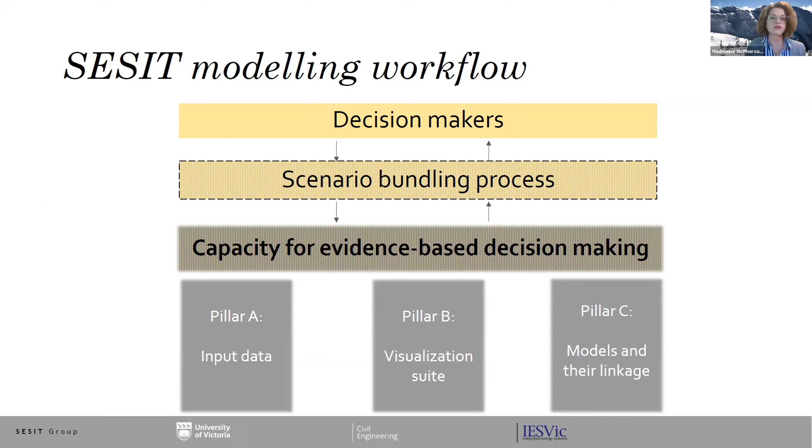All of this is part of a much broader workflow, working its way all the way up to supporting decision makers. So in today's presentation, Rick and I are going to start us off with a review of CODERS, which is a large database we've been assembling to populate our sector-specific models that sit within our broader modeling suite.

I've touched on our overarching objective, and now we're going to move on to some of the data challenges we've faced and how several key priorities have informed our database design decisions. Next, Rick is going to walk us through the Coders database itself and how this links up with our SESIT modeling suite, specifically as it pertains to some of the electrification and integration questions we have. Then finally, I'm going to wrap up with some closing remarks on limitations that still stand and what our future work might look like.

The challenge that we face from a data perspective, and more broadly within Canada, really comes down to barriers between modelers and decision makers. This barrier really impedes some of the deep decarbonization efforts that we need to operationalize if we're going to hit some of our climate mitigation targets.

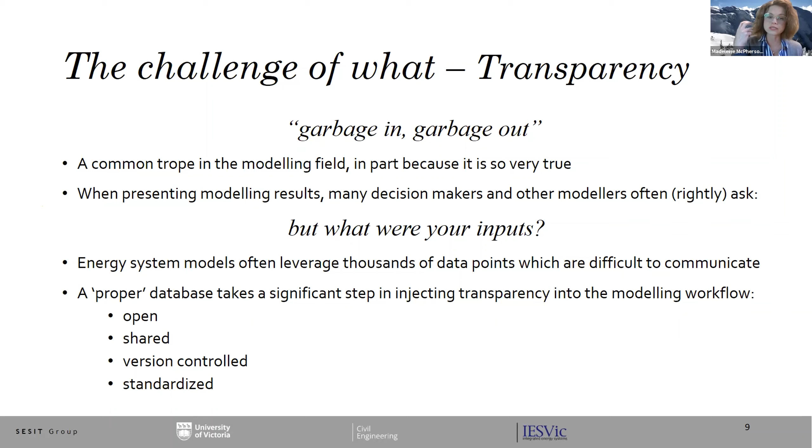Coming back to our primary question: how can we model the electrification and integration of energy systems to explore and implement deep decarbonization pathways? What we're trying to argue is that we need a new platform that delivers a holistic understanding of electrification and energy systems integration, one that also sits within an institutional structure conducive to and effective in the decision-making process.

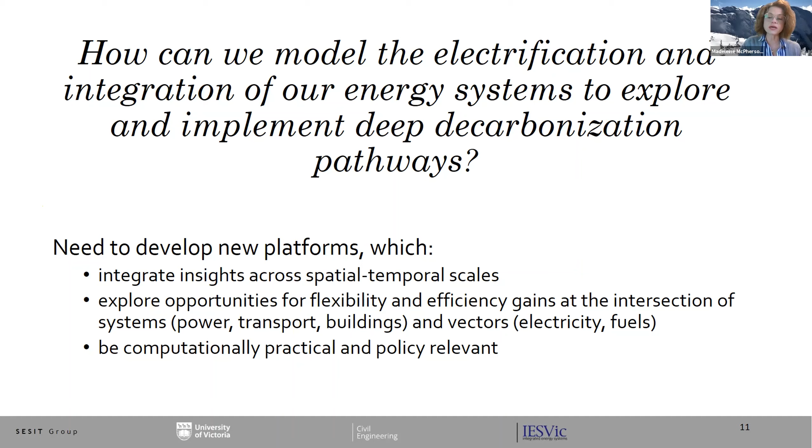Such a platform needs to integrate insights across spatial and temporal scales and explore opportunities for flexibility and efficiency gains at the intersection of systems and vectors. But it has to do so in a way that is still computationally practical and policy relevant. Looking through this list, we see that we need to assemble an integrated suite of modeling platforms supported by an integrated and consistent set of data.

So the SESIT modeling suite is attempting to pull together this integrated and holistic perspective by representing each of the energy systems with a standalone model. Making this decision allows us to address the full complement of sector-specific operational constraints. It allows us to leverage a diverse and appropriate suite of modeling methodologies within each of these sectors, and it also allows for a lot of extensibility—we can swap alternative models in and out of the platform, using certain models or not depending on the research question, and so forth.

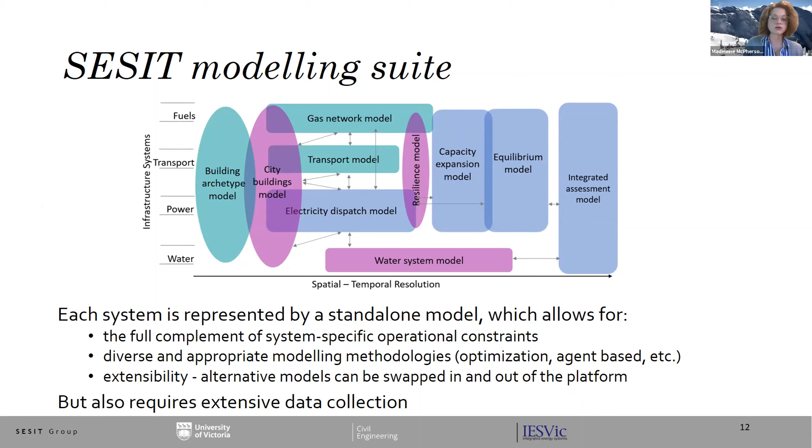But looking at this suite, you can see this is going to require an extensive amount of data to populate each of these models. So at this moment, I'm going to pass it back over to Rick, who's going to talk about each of the data inputs to these models and the CODERS database specifically. So over to you, Rick.

Thanks, Madeline. Good morning everyone, or good afternoon for those a little further east. My name is Rick Hendriks. I am a PhD student in civil engineering at the University of Victoria, and I've been the primary person responsible for gathering all of this data over the past 18 months or so. We're sweltering in the sunshine here in Southern Ontario today, so I'll try to shed a little bit of that light onto the CODERS database.

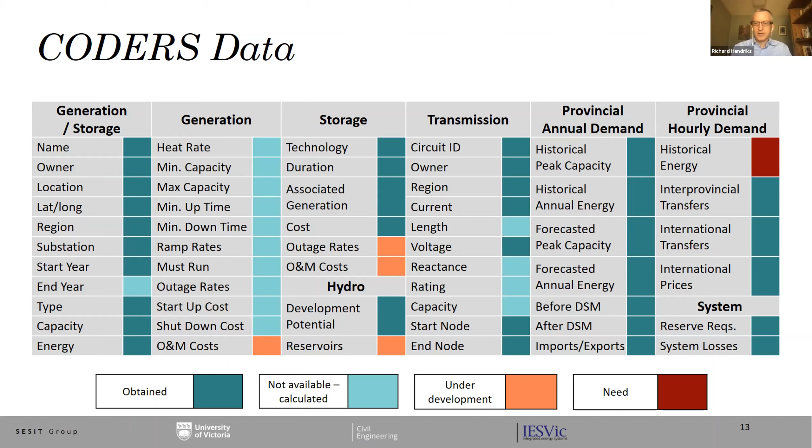I'm going to use a legend throughout these slides. The dark green indicates high quality data we've obtained from a variety of sources—utilities, system operators, government, etc. The pale green indicates data that was not available in the format we would have preferred, so we've had to calculate, measure, or estimate it to acceptable thresholds of error. Some data is still under development, meaning we have a request outstanding to a data provider, or we're still sorting through it. The red is data we still need—we weren't able to access it, and we don't have it from measurement or calculation. Next slide please, Madeline.

So the first model in the suite is a capacity expansion model. The model being used by our group is called the Canadian Opportunities for Planning and Production of Electricity Resources, otherwise known as COPPER. It assesses how the electricity system might evolve in terms of generation, transmission, and storage in response to evolving needs, and how that evolution is affected by changes in demand, technology, policies, etc. It's a Canada-wide model, although it could be used at the provincial or regional level with multiple provinces—we're considering some of those options. It's also a static and dynamic model. Next slide please, Madeline.

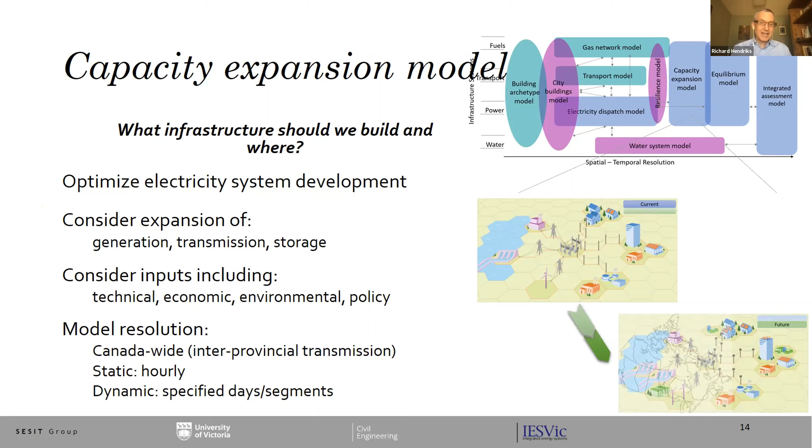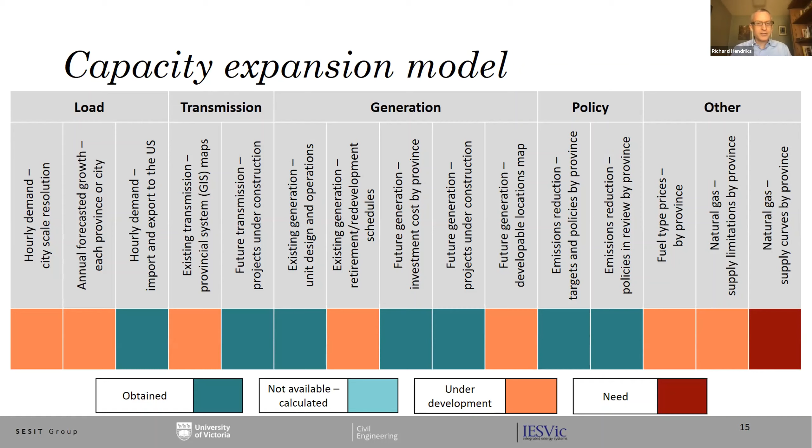This model requires a fairly broad suite of data. I won't get into each data point, but to give you a high level sense: we need load data, transmission data, generation, policy—what carbon policies, what other environmental or energy policies are in place that we want to model—and some other data, particularly around natural gas. This tends to be fairly detailed data. At the transmission level, that was probably the most difficult data for us to obtain, because we're trying to get length, voltage, reactance—not so much for this model, but for others—so it's been quite a challenge. The hourly data has also been very important for our models, and that's been challenging as well. Next slide please, Madeline.

So on to that next model, which is the electricity dispatch model. It's really the cornerstone of the modeling platform. The model we're using is called the Strategic Integration of Large Capacity Variable Energy Resources, a bit of a mouthful, so we just call it SILVER for short. Copper and silver, creative names, very clever names.

Basically this economic dispatch model takes the outputs of the capacity expansion model and assesses the operations, looking at the operational level. If the capacity expansion model says this is what we should build from a lowest cost perspective, the dispatch model is saying, well, can you actually do that? What does that look like? And what are some additional costs or cost changes that might occur at the operational level?

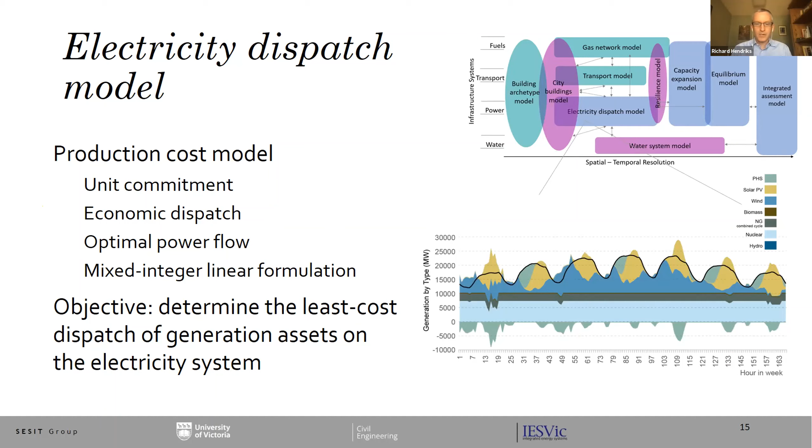In terms of data, since this is an operational model looking at the operational level of the system, we need much more detailed data at the hourly level and at the operational level of the various assets within the system. So generally, we have more data gaps in the database in relation to the dispatch model than the capacity expansion model. But we are working through these.

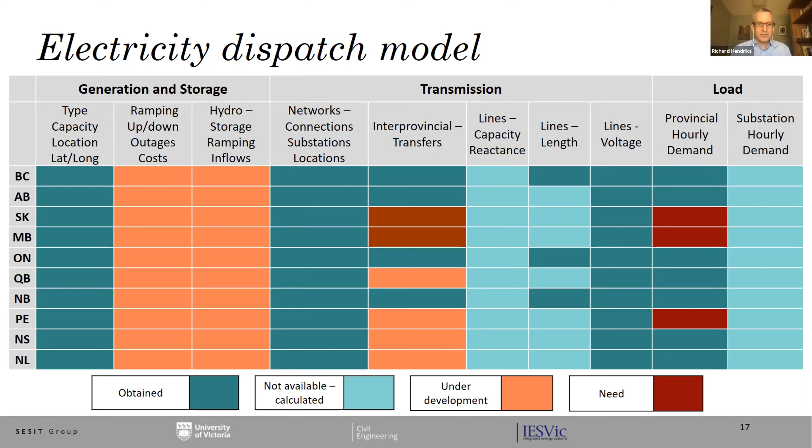As you can see, several of these are under development. And we have a few more red areas here where we're still seeking data, particularly in Saskatchewan and Manitoba, around transmission, design, and operations, as well as hourly load within the provinces and between those provinces.

So the third model is a transport sector model. Incorporating this kind of model into the platform enables analysis of transport electrification, which will be a key issue going forward, through both electric vehicles as well as hydrogen vehicles. It's also a multi-layered model, and my colleagues will be speaking about this model in a future presentation today, so I'll leave the details to them. For our purposes here, it includes several energy vectors, modes, and node types.

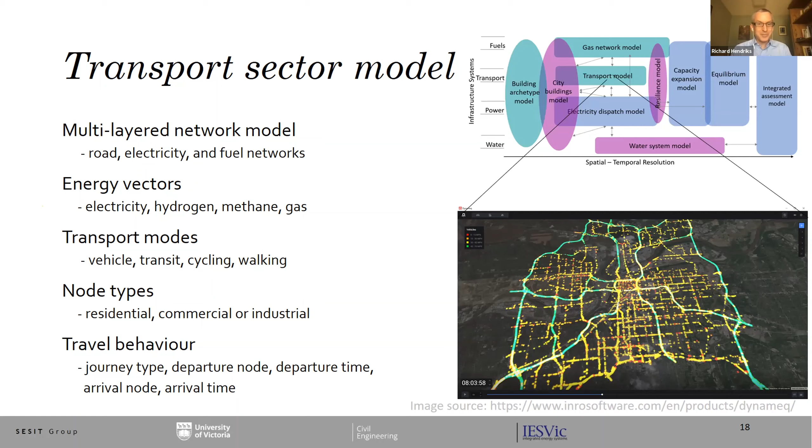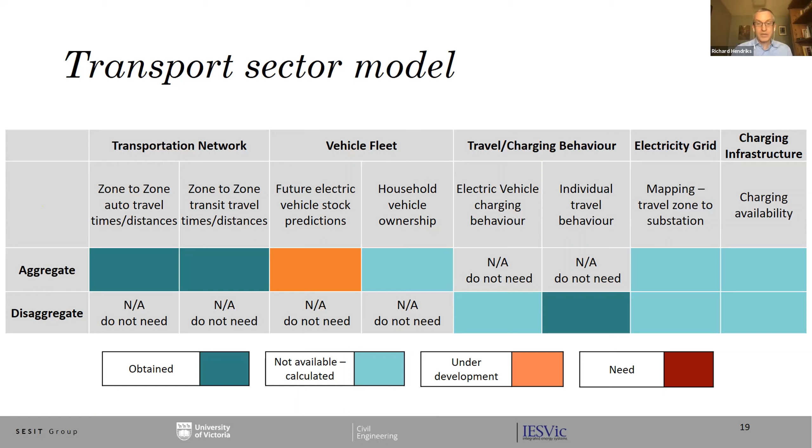So all of these, as you might imagine, tend towards data requirements. The focus of this model has been within the city of Regina, so this table relates only to the status of data for that modeling purpose. In general, we've been quite successful at getting the data in terms of modeling transportation within the city of Regina. Either we've obtained the data or we've been able to calculate it. There are a few things still in the works, but overall we have what we need to implement the transport model.

And of course, there's a building model. Incorporating a multi-vector building model enables exploration of things like heating electrification, on-site behind-the-meter electricity generation, and demand response, all of which are key aspects of electrification and decarbonization. The models we are using are largely existing models, but we're leveraging and adjusting those models for our purposes. Again, my colleagues will speak to that in more detail.

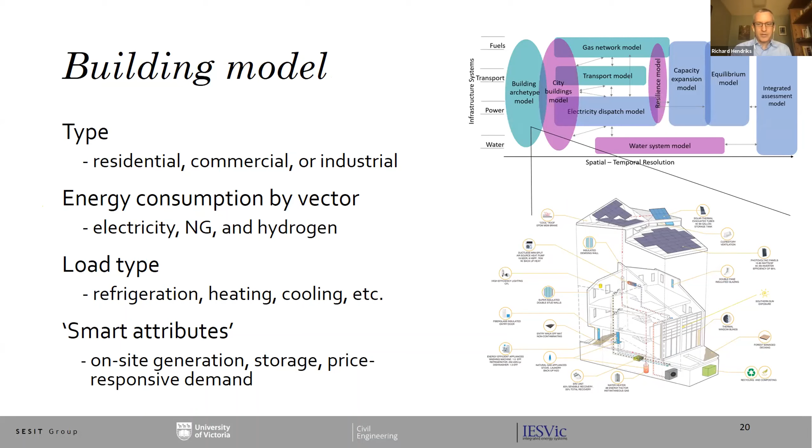In terms of data availability for the building system model, we characterize it in terms of availability at the building specific level, at the building archetype level, and also gathering data from surveys about various aspects of the built environment. Data collection here is very much in progress, and some areas are still under development, quite a few that we still need. Generally speaking though, if we can get good quality data from one of the sources within each column, then we're well on our way in terms of completing the modeling.

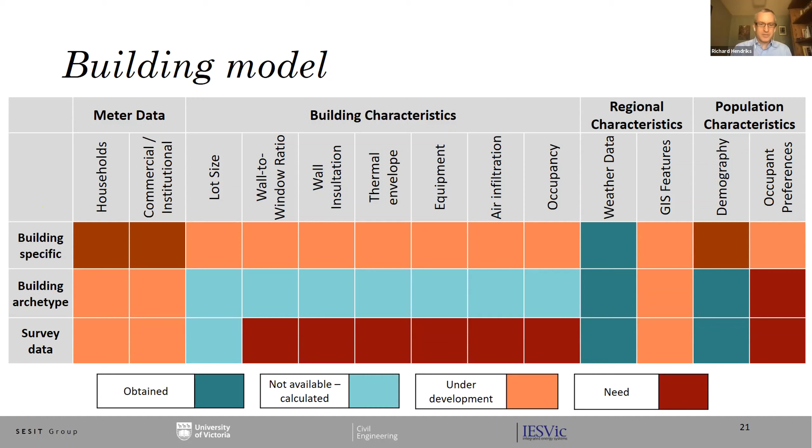At this point, I will hand things back over to Madeline. Thanks. So we still have a few limitations with the data, as I'm sure you were hearing a little bit from Rick there with all of those red boxes.

There's a number of limitations with the data itself. These are areas where we know we need data, or where we're still working to identify additional data that we need, particularly from other sectors, both other energy sectors, but then also beyond the energy sector, looking at things like water, agriculture, industry, climate change, and so forth.

Our next limitation really comes down to access privileges, and these stem from the fact that currently our database is hosted through Compute Canada, which allows access to researchers who have statuses confirmed or sponsored by faculty members at Canadian universities. So currently this is limiting our pool of users to people with some kind of connection to academia. Our future work is going to be migrating this database onto a more broadly accessible hosting platform.

And part and parcel with that is going to be a website and a GUI with a nice front end to allow users with different interests or a modeling capacity to interact with the data and connect that front end to the back end, which would retrieve the data, process it, and send it along to the front end.

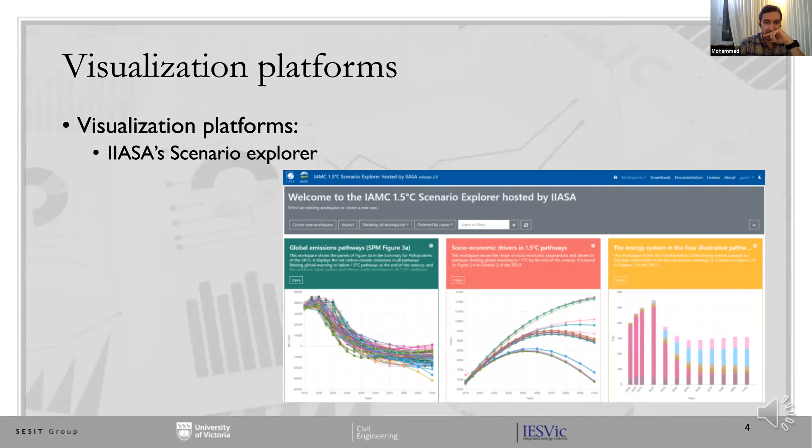In the electricity system modeling community, visualization platforms are mostly software specific. There are limited options for presenting visualizations from different models in a single space. The options for comparing between models are thus limited. Commercial modeling tools have their own interface and visualization module, but they are rigid and tied to their own base model. Even in open source models, the visualizations rely on custom implementations of open source plotting functions.

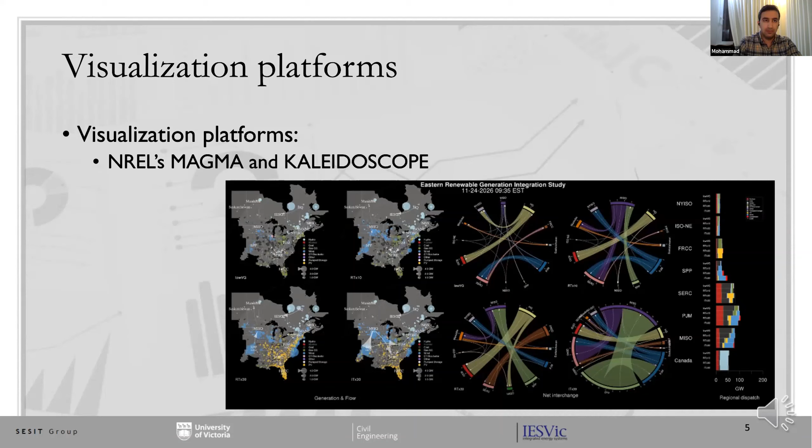Magma and Kaleidoscope are developed as an open source package by National Renewable Energy Laboratory to plot Plexos, their electricity operational and planning models outputs. They do not accept generic inputs and are bound to receive Plexos specific outputs.

In conclusion, most of the visualization platforms only involve the integrated assessment models. Most of them are model specific. Therefore, sectoral and high resolution models are not still communicated in the most efficient way to the stakeholders.

Based on the reviewed limitations, and accurately studying the needs from the modeling and policymaking communities, this research is looking for the following objectives by developing an integrated modeling platform that includes 5 different model types: integrated assessment models, capacity expansion models, electricity operational models, transportation models, and building energy simulation models.

First, this research develops a process flow to convert the results of the models into a standard data format. Second, this study develops a set of plotting functions that use the standardized results to create figures with interactive widgets that allow for quick multi-platform comparisons. Third, the platform developed in this project is accommodating a standardized but flexible format for reporting model outputs. And finally, the project publishes the code in an open, accessible, and transparent manner, completed with appropriate documentation.

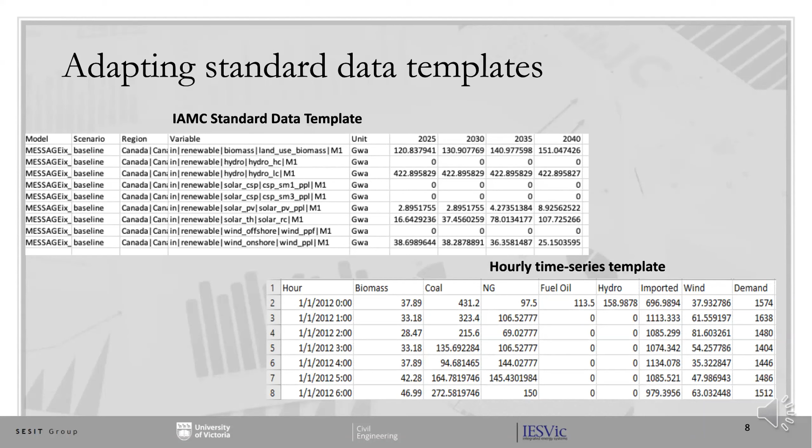The workflow of the platform is as follows. Results from an energy system model are post-processed into a standard data template, chosen out of the two templates we mentioned previously, based on the model type. The post-processed output data template then can be categorized according to user-specified criteria. Followed by the data structuring, a plotting function is performed on the resulting data structures and then hosted on the visualization dashboard. The plotting functions have the capability to plot interactive plots for the model results. These results are then integrated on the visualization dashboard.

The models that are integrated in the platform are categorized based on their data template. The first category uses the IAMC data templates, which includes two model categories. The first is the integrated assessment modeling category.

These modeling tools help researchers and policymakers understand the long-term consequences of varying socioeconomic development and climate change scenarios across various scales, energy vectors, and sectors. They are mostly used for assessing the costs and benefits related to climate change impacts and mitigation strategies.

MessageIX Canada is built from the MessageIX Globium framework, specifically for this project by SESIT. The model combines different modeling frameworks to assess multidisciplinary policy decisions. Results from these models can answer ambitious global warming goals at least possible cost.

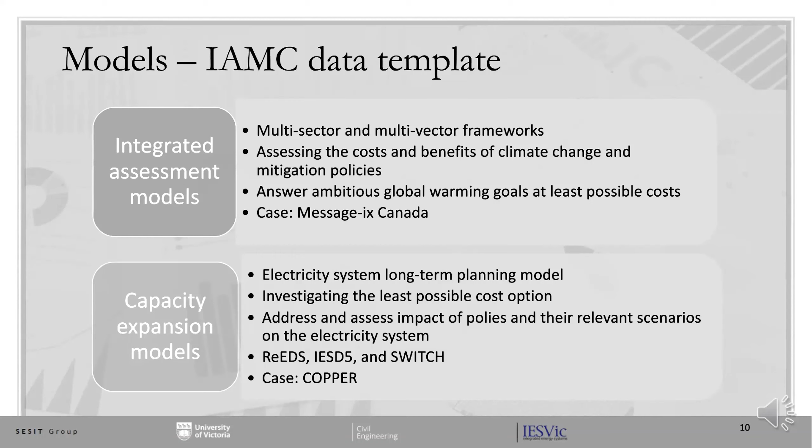The second category belongs to the models that use a similar time series data template here, in an hourly resolution for the project. The first category is the electricity system operational model, which simulates an electricity system's operation over a relatively short period by involving technical ramping requirements and network constraints.

They can answer questions about a given generation fleet's adequacy and reliability in the presence of intermittent variable renewable energy resources, and with the retirement of pollution-intensive plants, thus having a significant role in exploring different policy choices.

Several models are developed within the Canadian domain, and this project uses the case of Silver, the model that is developed by the SESIT team again.

The next group and category is the transportation models. Transportation models are designed with the goal of simulating the transportation demand load in various energy sectors. Electrification of the transportation system is targeted and crucial in carbon mitigation policies, specifically in Canada, which requires 23 megatons of reduction to be contributed by the sector by 2030.

The model used for this project is the SESIT team's transportation model based on TASHA.

The next and final category is the building models, which are designed to simulate energy demands in buildings based on residence comfort, weather data, and buildings' physical specifications. Energy efficiency improvement and demand response potentials are two main factors that make buildings a pivotal sector in assessing certain policy instruments.

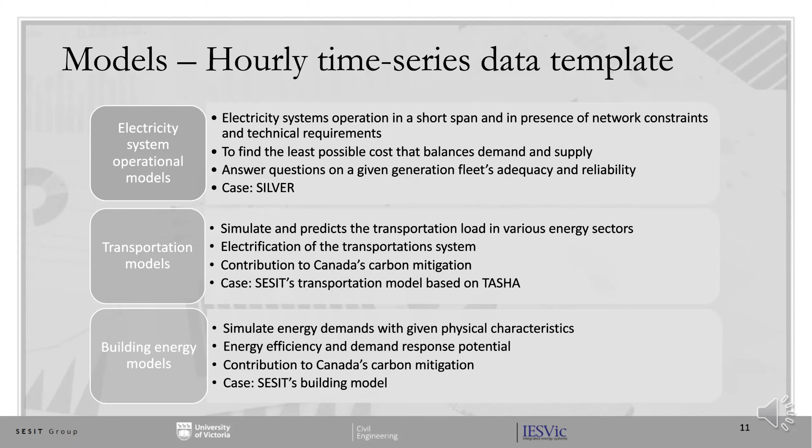Our whole platform is developed in the Python programming language due to its usability amongst various research communities in energy systems modeling. We use the Panel library in Python to integrate our visualization tools on the dashboard.

Panel is an open source Python library that allows users to create custom interactive web apps and dashboards by connecting widgets, such as drop-down boxes, sliders, and buttons, to the plots.

The decision to use Panel was based on what it provides: a stable platform for hosting apps for the models described.

Panel hosts its own tutorial showcasing common operations most developers would want on their applications, making the learning curve simple. Also, ease of user interactivity is a priority for this application.

Panel also delivers seamless integration of widely used plotting libraries, such as Matplotlib and Bokeh, which is used for this project. Here we provide a video tour of the visualization platform.

The whole visualization platform is accessible via a GitLab repository.

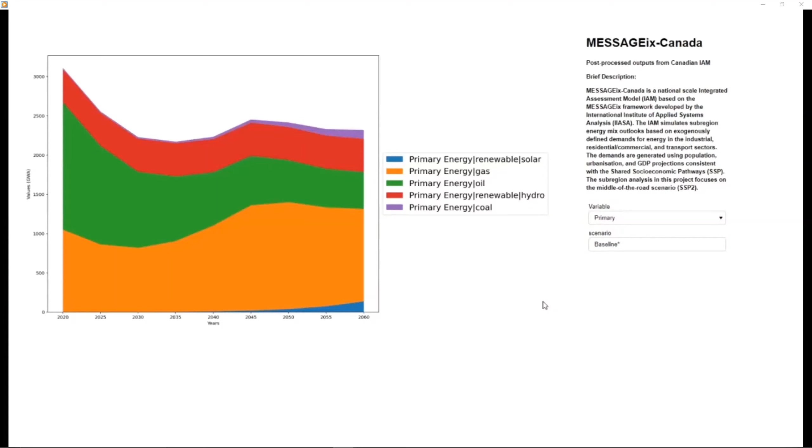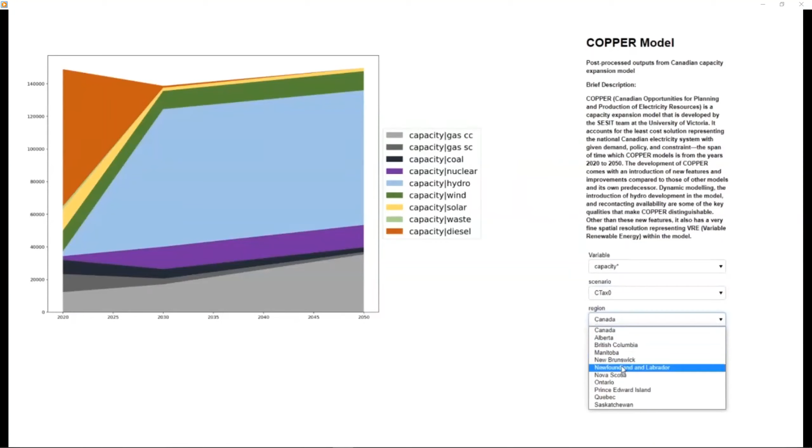The second component of the platform shows interactive results from the Copper model. The drop-down box allows us to navigate through the modeling results of various variables, 5 different carbon tax scenarios, as well as regional results from each province in Canada, as well as a total overview of Canada itself.

Here are some of the various plots you will be seeing if you decide to play around with the functions.

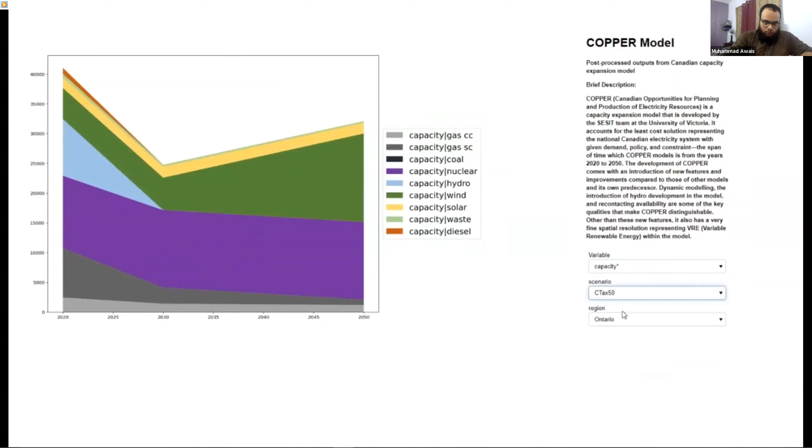The third component of the toolkit shows interactive results from the SILVER model. These interactive plots allow more user-friendly options such as zooming into specific parts of the plot or even being able to pan the graph around to get the exact angle that you would like.

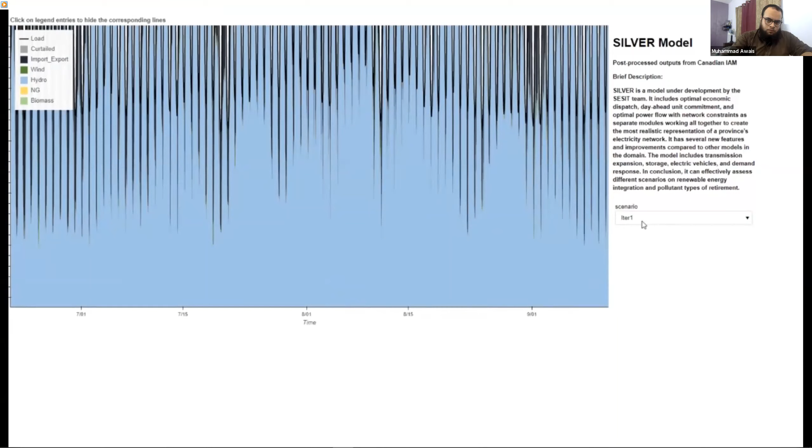Furthermore, zooming into specific parts of the plots and visualizing the aggregated time series data, you can see that the time on the bottom adjusts, and you can filter the graph to see specific portions of time that you would like covered. The drop-down option to choose between different parameters of results is exactly the same as seen before. There are two different scenarios in this case.

Another important feature is the legend. This legend is interactive. If you would wish to remove some pieces of data that you do not wish to see, simply click on its name in the legend and it will disappear. Click on them again and they will reappear.

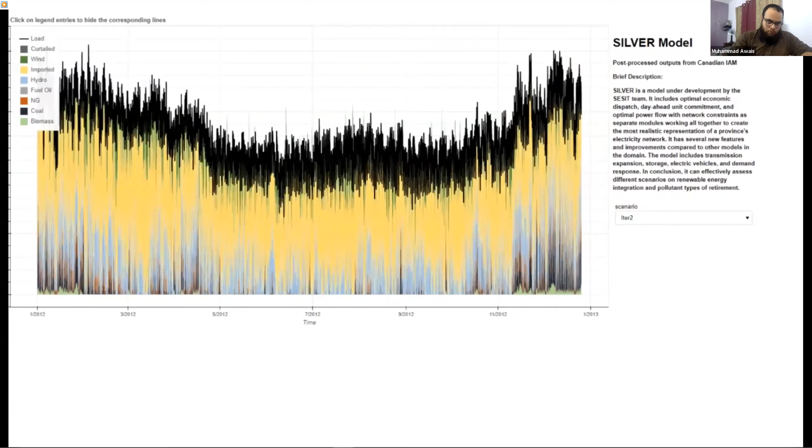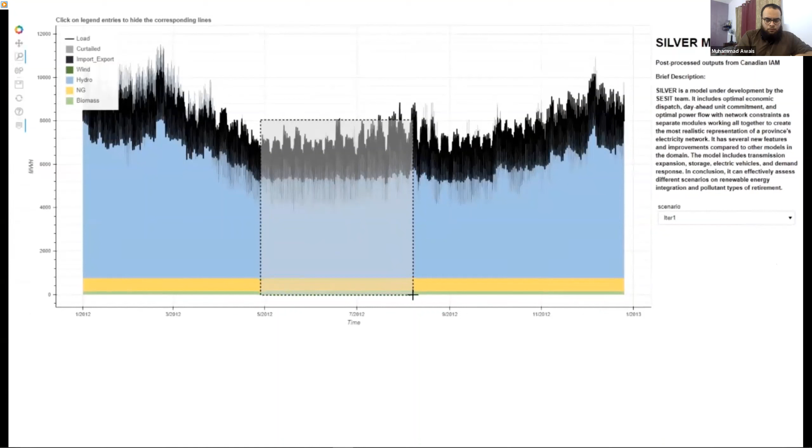Another relevant tool in the SILVER model is the use of the box zoom. On this left-hand section, there is a small magnifying glass labeled box zoom. If you click that, it will enable you to pan and cover a specific portion of time to your liking and get a zoomed in version of the data. The reason why this is so useful is the data does not get morphed, it spans to fit the whole graph in front of you.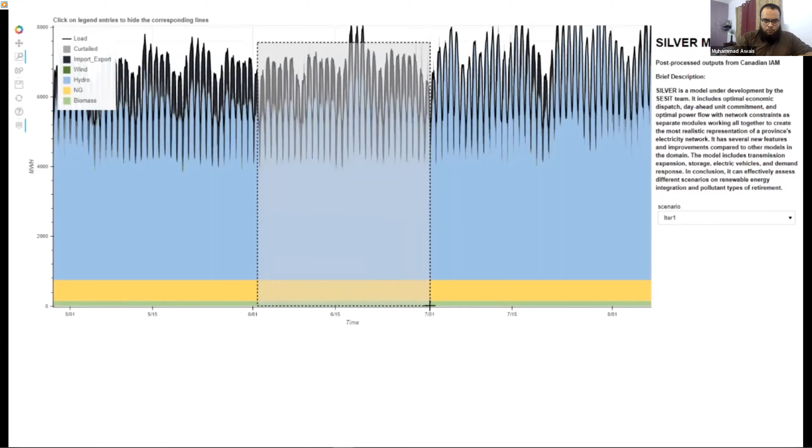If you would like to zoom in some more, you can do that as well. Simply draw another box and you will have more data to look at, as well as updated time values at the bottom.

The transport model works in a very similar way to Silver. The interactive legend exists here again, and the time series data exists as well. Simply zoom in. There is also one variable box here, designed to take different months of data.

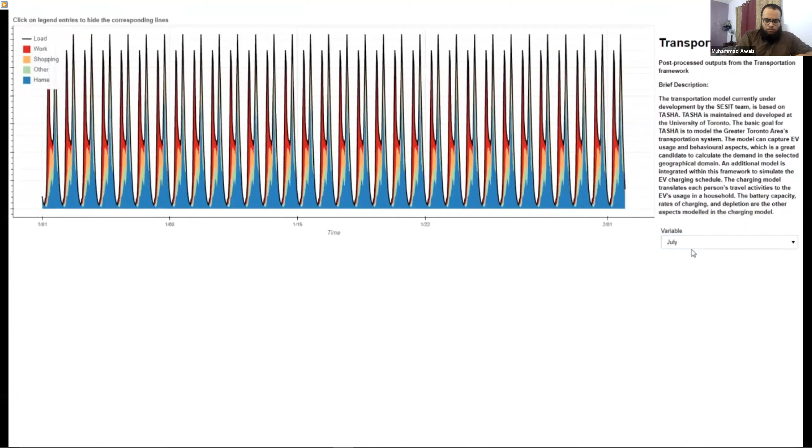The buildings model works in the same way that Silver and Transport do. Once again, you may highlight and unhighlight different pieces of data depending on what you wish to see or don't wish to see. There is a scenario option to load different pieces of data, and in this case you may zoom as well, which would also load the time series data and update the legend accordingly.

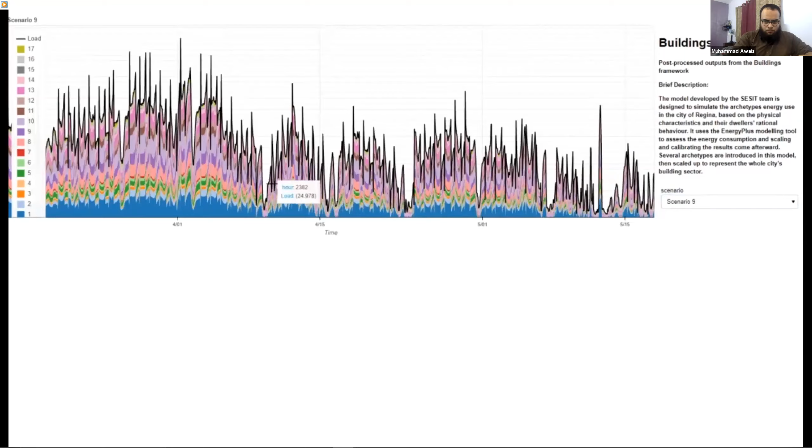Thank you for following this guide on the visualization platform created by the SESIT team at the University of Victoria.

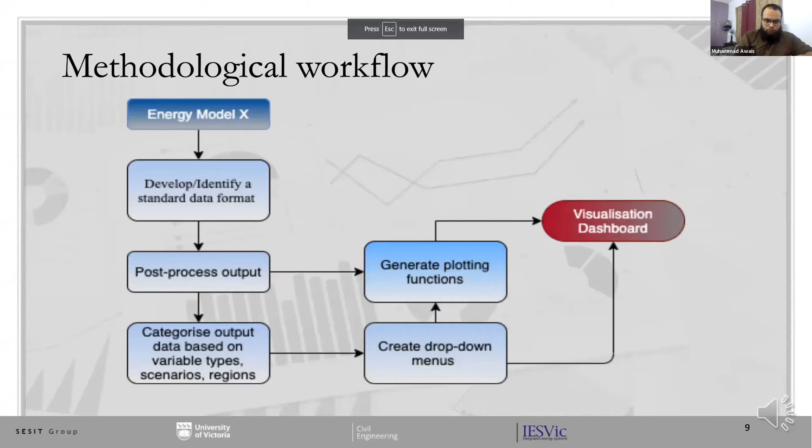The whole visualization platform is accessible via a GitLab repository. All the packages used in the platform have open source and open access licenses. Moreover, it uses open source Python libraries that are well documented and include tutorials to allow reusability and transparency. The project report will also be available at the EMI website and provides detailed software documentation, model details, and the methodologies adopted for building this platform.

There is also a user manual available for this project that explains how new users can easily access, download, install, and apply the fully functional apps for different models. In conclusion, the platform's transparency is maintained based on the documentation, implemented open access codes, and open source packages included. We invite contributors and modelers to use the platform and integrate their modeling results on it.

At this stage, the platform requires a beginner level of Python knowledge to be able to use and implement it. At the moment, the platform only integrates sample results from selected models described previously. Also, the plot types are limited for now, although more plot types can be integrated. The user can't directly upload results and visualize their use cases, and might need to adapt model data onto standard data templates.

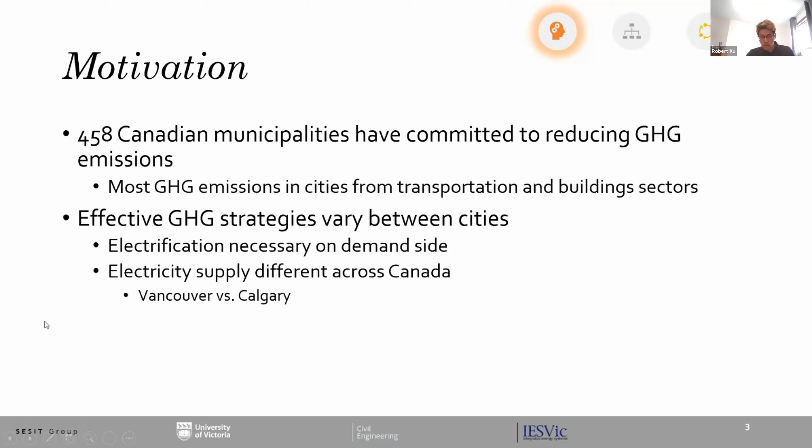But in terms of electricity supply, there's some very big differences between regions. For example, Vancouver draws from one of the cleanest electricity grids in Canada, whereas cities like Calgary and Regina may draw from more carbon-intensive grids. So for electrification to be a valid path for deep decarbonization, the electricity that powers these electrified technologies should ideally be low emitting.

So for cities that currently have more carbon intensive electricity supply, one strategy for them, along with electrifying their demand sectors, is to integrate more renewable energy into the electricity supply. This includes technologies such as wind and solar energy, and these technologies are inherently variable. They can't ramp up and down depending on the demand characteristics.

As a result, to avoid undesirable outcomes from integrating these technologies, such as curtailment, which is essentially wasted energy, there needs to be some source of flexibility on the system to accommodate when either the renewable generation is high or low. This figure shows how both electricity supply and electricity demand can contribute to adding flexibility onto the system.

On the supply side, flexibility can come from energy storage, such as battery storage or pumped hydro, which stores energy if there's a lot of energy being generated that would otherwise go unused. On the demand side, through a mechanism known as demand response, demand can provide flexibility as well. Demand response is basically defined as a shifting of demand in order to match characteristics of electricity generation. We investigate demand response in the transportation sector through electric vehicle charging, and in the building sector through changing of building heating set points.

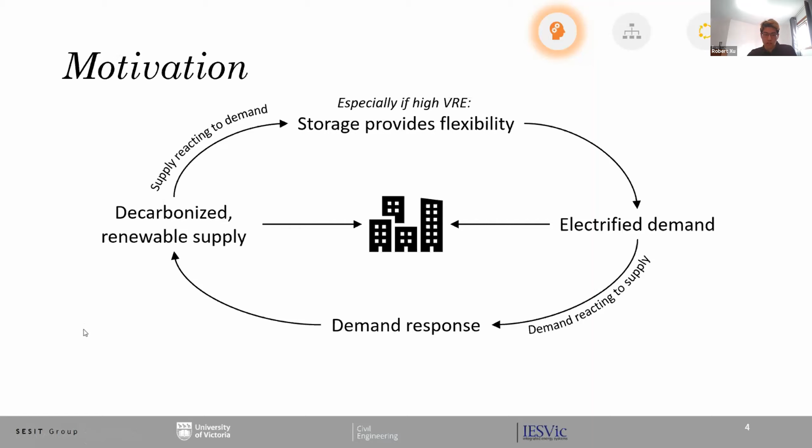The last bit in our motivation section is just to highlight our contribution to what we feel are some modeling gaps that currently exist in the modeling space. I'm just going to describe some modeling gaps as well as how we try to address them with our city-scale integrated modeling platform. The first one, which has been touched on previously by Professor McPherson, is that in some cases spatial and temporal resolution may be too low for some modeling needs in existing city-scale energy models.

We address this using operational models of both the transportation sector and the building sector, so the demand side, as well as an operational model of the electricity system model. This gives us high spatial and temporal resolution to model variability in renewable energy as well as different spatial characteristics.

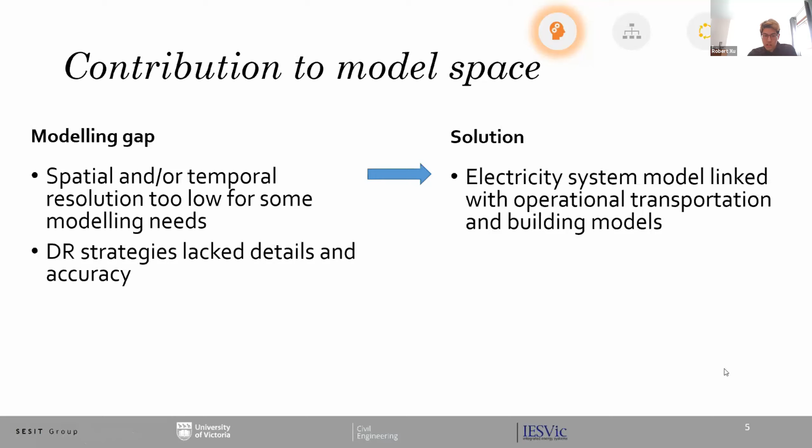Related to the first point, demand response strategies are a crucial focus of our work as they represent the flexibility of the system and the ability of demand to help integrate more renewable energy. We find that representation of demand response in current models lacks detail and accuracy. Using our operational models of the demand sectors, this gives us a greater representation of some of the constraints that demand response faces in terms of preserving consumer comfort, and allows us to represent a wider variety of sectors.

Finally, this has been touched on as well. We find that there's a communication gap between decision makers at the city scale and energy modelers, and we're going to present on this as well. We propose a workflow to help translate the knowledge from policymakers on which strategies may be more successful into modeling scenarios, to help facilitate workflow between the two parties.

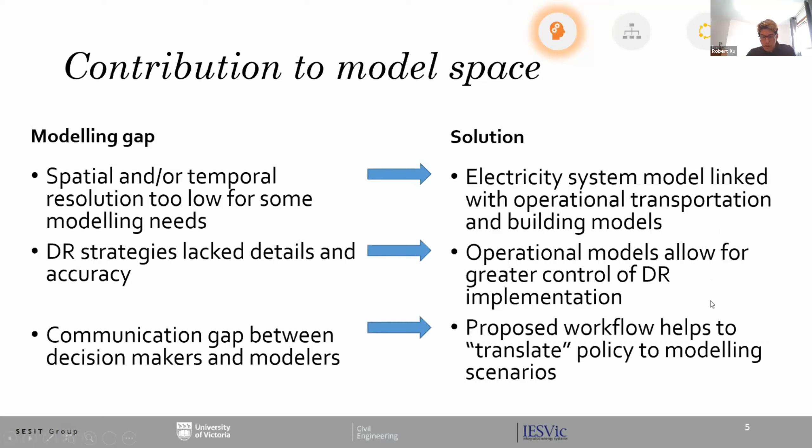So I'm going to pass it on to Lauren now, and she's going to discuss in detail our model formulation. Thanks, Robert. So as Robert mentioned, our platform links together three submodels of different sectors: the transportation sector, the building sector, and the electricity system sector. And the way our model works is it runs through three different stages.

In the first step, we define a policy scenario, which might consist of adding electric vehicles or switching to electric-powered building heating. I noticed in the chat someone asked about ground source heat pumps being efficient — in fact, one scenario we could add is using ground source heat pumps in buildings, just as an example. After defining our scenario, we pass those new parameters to the transportation and building model, and we model the demand that would occur from those sectors as a result of the policy scenario. Then we pass that to the electricity system model.

Given that information, we can also look at what the electricity system will have to do to meet that demand, and understand how much curtailment is associated with it. If a lot of renewable energy is being wasted, we don't want that — that's bad.

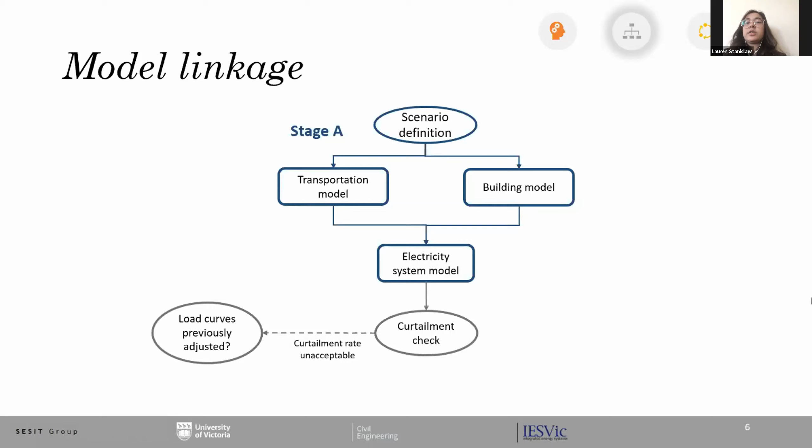So if it turns out there's a lot of curtailment, we run the model again in stage B, where we apply demand response strategies to the transportation and building models — I'll talk about those more in the next sections. Basically, we adjust the shape of the demand curves coming from the transportation and building models, then run the model again. Finally, if there's still too much curtailment after that, we run the model a third time in stage C, where we add storage technologies.

Overall, this model linkage process enables us to explore different policy scenarios and pathways by which we can switch to powering our entire city-scale energy use with renewable energy, as opposed to non-renewable technologies. And then finally, if everything works out, the curtailment rate is found to be acceptable, which indicates that we've switched to using renewably generated electricity instead of other sources such as coal.

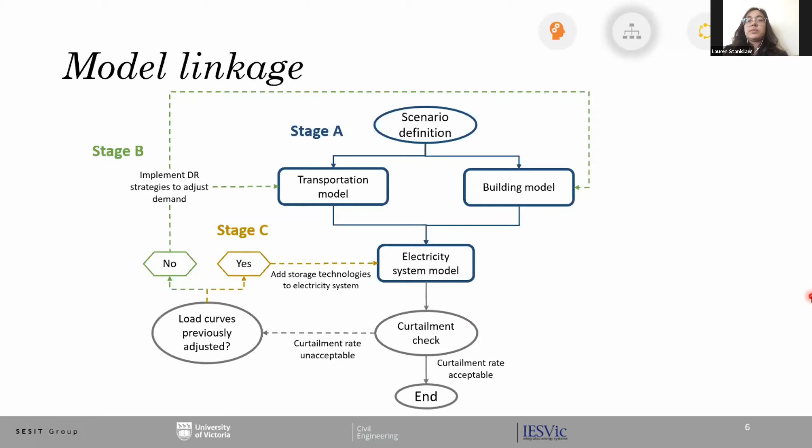So that's overall the contribution of our model. If you go to the next slide, please.

In the transportation model, we start by defining the transportation infrastructure in terms of the roads that exist and how different places are connected through means of transportation. Then it takes this information and calculates the travel times it would take to go from one location to another. We also look at the characteristics of the population and the trips they would go on, in terms of where they want to go and when.

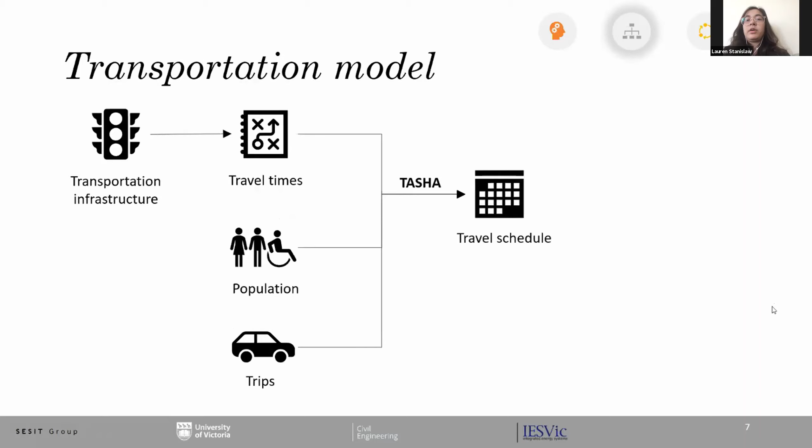Given all this information, we use a model called TASHA to come up with a travel schedule, which basically predicts for the entire city where people are going and when they're going there. This information is important because, combined with charging parameters for electric vehicles, we can input it into a charging model.

We can understand when electric vehicles need to charge in order for those trips to be completed by electric vehicles, and this gives us the total demand for the transportation sector in terms of electricity used by electric vehicles to make all those trips.

Finally, if we want to implement demand response, this is done by changing the electric vehicle charging parameters. Normally without demand response, there's some strategy where, when people get home from a trip, their electric vehicle is immediately plugged in and charges. But when demand response is applied, since we know when trips are expected to occur, as long as the vehicle charges before the trip, that's fine.

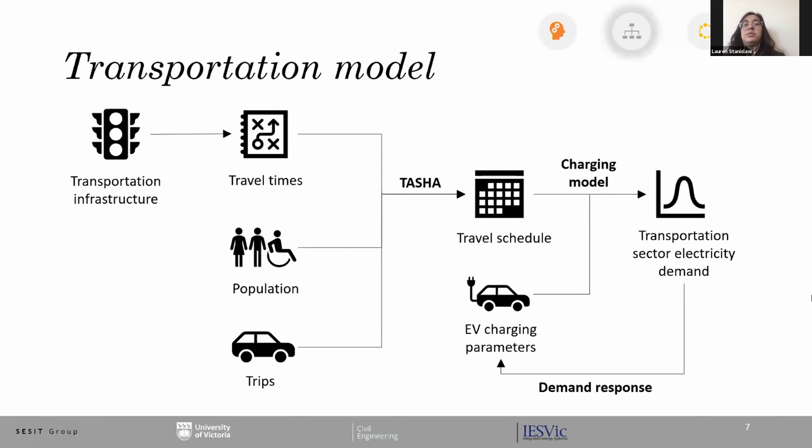This can be used to time when charging occurs so that it happens during periods of curtailment, allowing the charging to be powered by renewable electricity, which is good. Similarly, in the building model, we start by defining archetypes — representative buildings meant to represent the entire building stock in the city.

And once we've defined those archetypes, that means that we're assuming what their physical properties are, and the properties of the heating, ventilation, and air conditioning equipment, which keep the building at a reasonable temperature and suitable for people to live in the building or do their activities there.

And the building model also looks at historical weather and at the temperature set points that people might be using to keep their building at a reasonable temperature.

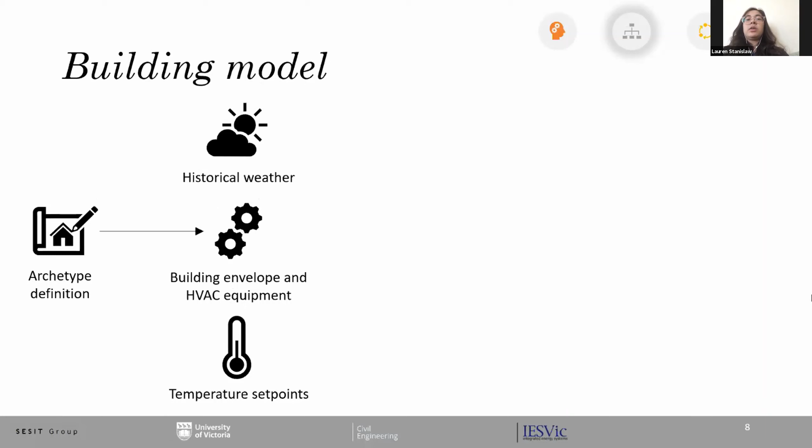And this information all gets put into a building thermodynamics simulator called EnergyPlus, which simulates heat exchange between the building and the environment and is used to calculate the thermal load of the building.

And this information is combined with some historical data on appliance demand, which tells us the time when people are using certain appliances, such as turning on their lights or charging their electronics or using home or work appliances.

And the thermal demand and the appliance demand are combined to get the individual electricity demand for any building that's being modeled. And finally, since we started this out by modeling only certain buildings in detail, we then multiply by

the number of those buildings in the population to aggregate up to the level of the building sector to get the electricity demand for the building sector.

And similar to the transportation model, demand response is applied by changing some of the parameters. In this case, it's done by changing the temperature set points.

So for example, instead of heating a building to whatever temperature is defined according to industry standards, we might make the building a little bit warmer when there's curtailment on the grid.

And this will have the effect of preheating the building, so that when the curtailment has stopped being on the grid, the building will be a little bit warmer and it won't need to use as much energy in those first couple of hours or minutes to keep itself at a reasonable temperature.

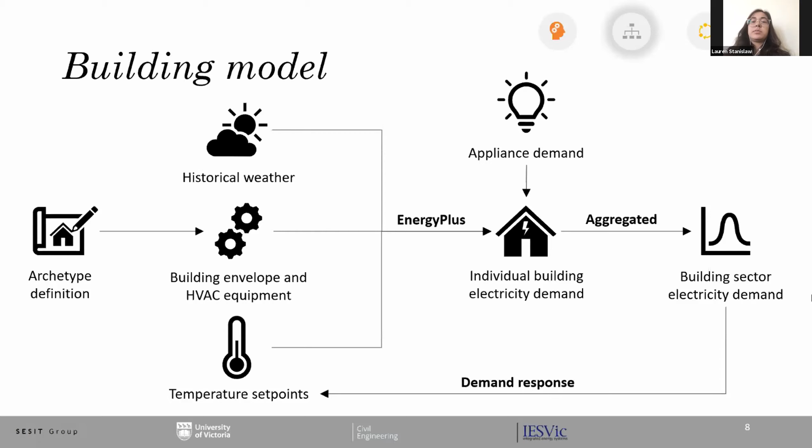And so through this way, some energy is saved and more renewable energy is used as opposed to other sources. If you go to next slide, please.

And finally, the electricity system model is the Silver model that was mentioned previously. And this model is linked to the building and transportation models by incorporating their load curve that comes from each

of those models, and also incorporating some other load from the rest of the city to understand what the load is. And that tells us the electricity demand for the entire city.

And combining this with electricity system characteristics and also with historical weather characteristics, which are used to understand how much renewable energy can be produced from wind and solar, we are able to come up with the user-defined scenario that

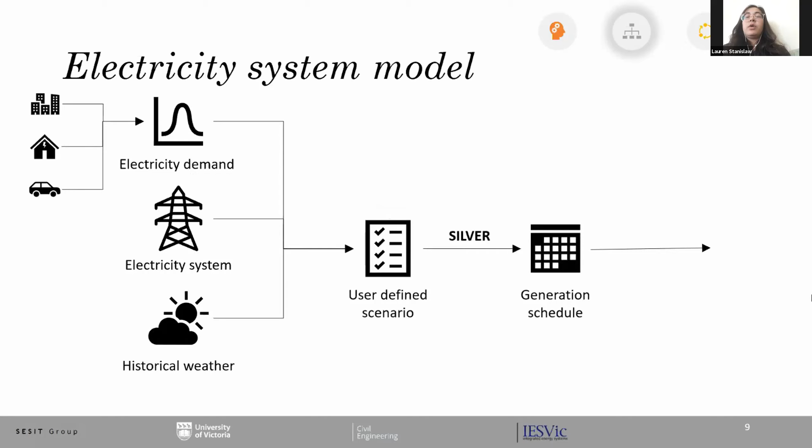will tell us basically how much electricity demand there is, as well as how much variable renewable energy is available to power that demand. And then this information is all passed to Silver, which predicts the generation schedule of when different generation assets will need to be running in order to meet the defined demand.

And knowing the generation schedule allows us to know the cost of generating this electricity, the associated emissions, and also the curtailment that is resulting as a result of that schedule.

And finally, demand response doesn't actually affect the Silver model directly, but it does get passed to the building and transportation models, which change their input.

And then that information is propagated through the electricity system model to come up with the finalized costs and emissions and curtailment that are associated with demand response.

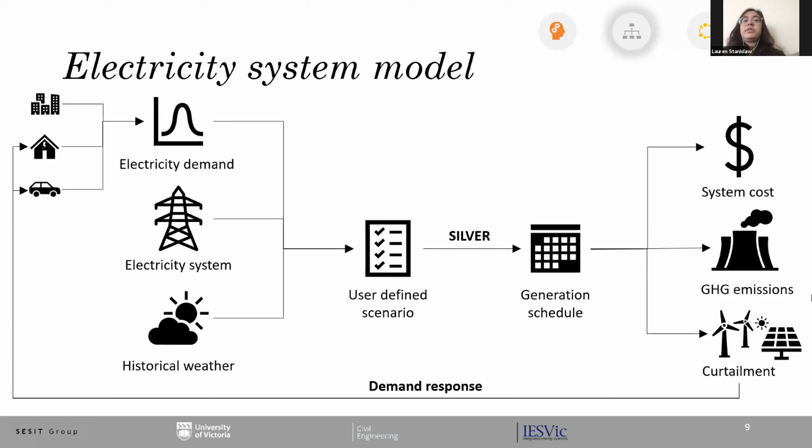And so those are the details of all our models. And now I'm going to pass the presentation on to Maddie, who is going to be talking about our overarching model workflow that can be used to facilitate communication between modelers and decision makers.

Yeah, so as mentioned, our workflow that we've proposed is mainly for defining our scenarios. So to really leverage the knowledge of decision makers and policymakers in coming up with these scenarios.

So it starts out as any good workflow does, with communication between the modeler and the decision maker. Then we've

created a scenario template as well as a large list of data sources that we use, which can be passed on to the decision maker to either be filled out or to be referred to in the process. And then other assumptions need to be made by the modelers to go to the finalized scenario definition.

After that, we run it through the city scale integrated model platform, and we analyze the results. So let's go through a quick example of how this would be done.

For this example, let's say there is a tax incentive being introduced for residential buildings to offset the cost of insulation retrofits and electrification. The decision makers have some knowledge, maybe through surveys or other sources, that they believe insulation retrofits will be more popular than electric water or space heating electrification. The purpose of the scenario is to find out what the effect will be on greenhouse gas emissions and the cost of electricity.

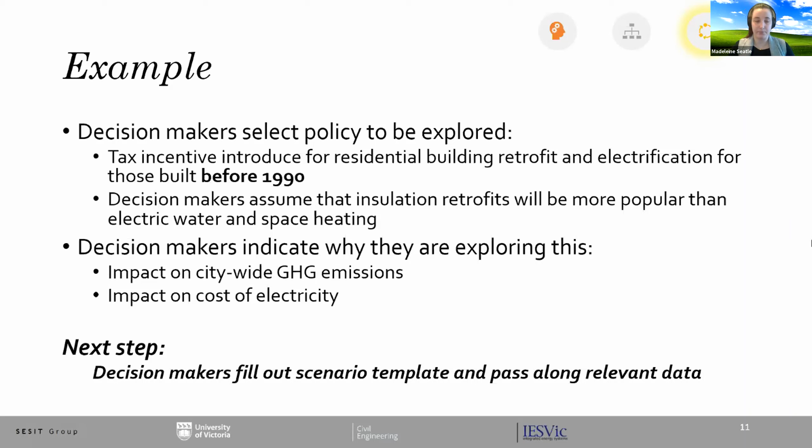So the first step is to fill out the scenario template with their assumed parameters for the scenario, as well as pass along any relevant data. The scenario template we've compiled is like a fillable form for the decision makers. The relevant section they would fill out in this example would be based on the residential building parameters.

This would be an example of how they could fill it out based on their assumptions. They assume maybe 75% of viable buildings will electrify their water heaters, and 50% will electrify their space heating, with a split between forced air furnaces and ground source heat pumps. And since they assume insulation would be the more popular retrofit, they assume all viable houses will do that in this scenario.

There's also a note saying these penetration values are just based off the percentage of houses built before 1990. The next step is to pass along any relevant data that the decision makers would like to, or if not, to review the data sources being used by the modelers.

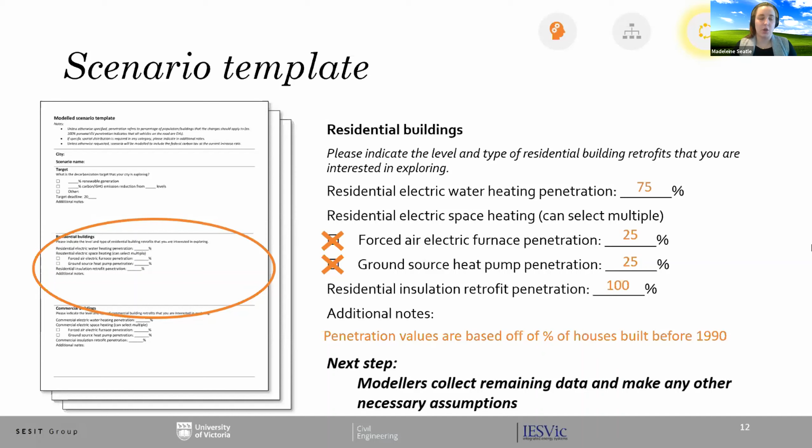We would also distribute a table like this, a data source table, which would list the data source, the purpose of the data source, as well as our preferred data source. If there was relevant data they would like to pass along, the decision makers can do so now, or it would be taken from our preferred data source that was listed.

So in this case, for building type and vintage data sources, we've listed Statistics Canada census data as our preferred source. The decision maker could then decide if that is acceptable or if they would like to collect their own data.

An example would be that it's found, either from the decision maker or the modeler, that 50% of residential building stock is built before 1990 in our example city. Other assumptions, mostly on the modeling side but which could be run by decision makers, include the type of new technology being installed, the insulation levels, and potentially current insulation levels and technologies assumed for comparison purposes.

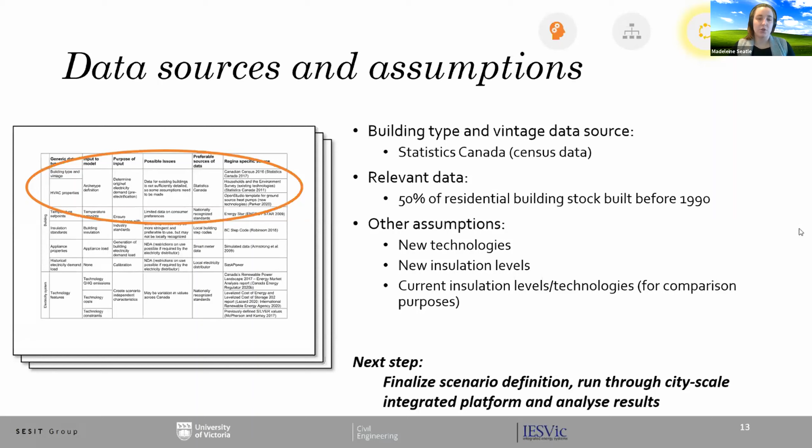After this, the next step is finalizing the scenario definition, running it through the city scale integrated platform, and then analyzing results. Skipping ahead to analyzing results, this would be a table of all the possible results that could be found from the city scale integrated model platform, which would be distributed to decision makers.

In this case, as can be circled, greenhouse gas emissions and the levelized cost of electricity are the most important on the decision maker side, as that's what they said they were interested in. However, there are also a lot of other results that may be more important from a modeling or operational side, such as building electricity demand profile, generation asset dispatch schedule, and curtailment.

So this would be an example of the model workflow, and I'm going to pass it back to Robert to finish us off.

Thanks, Maddie. I want to finish by talking about some applications of our work towards electrification and decarbonization via electrification. Our model doesn't predict technology shares as some existing models do, but it's more suited to taking predictions of certain technologies, the percentage of adoption, and what parameters those technologies have, to analyze scenarios around that information.

I've listed some examples of policies we can analyze using our model. EV market share goals, such as Canada's goal of 100% EV market share by 2040. We can also analyze the adoption of building codes, for example the BC Energy Step Code, which specifies energy efficiency targets for buildings. We can also model technology improvements in different sectors, such as electric vehicle efficiency and improvements in building HVAC properties and appliance technologies.

Finally, we can do pathway analysis of meeting renewable energy targets, such as Regina's 100% renewable energy target. In one of our case studies, we took different scenarios of the generation mix, what percent of solar, how much wind, and evaluated those scenarios based on the cost to meet Regina's 100% renewable energy target.

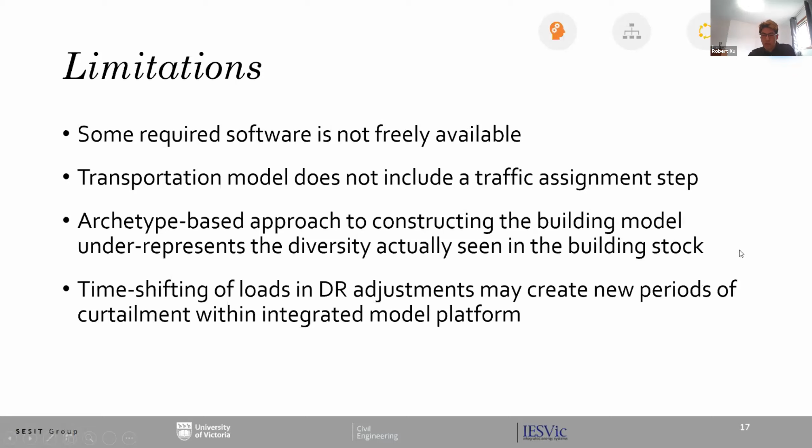Finally, we have a relatively simplified formulation of demand response. In this formulation, shifting of load can create new periods of curtailment within our model, which are not currently considered. But we do hope to address all these limitations if time allows.

And that concludes our presentation. Thanks for paying attention, and we're happy to take any questions at this point.

Thank you. Well, thank you all. Great presentation. We still have almost 7 minutes for questions. There is one question here about, well, some question about the scenario design.

Are you manually designing those scenarios? And if so, what are the logics for scenario development? And one question that could be linked to that is, why are you dispatching the DR before adding storage?

Sure, I can take a first pass at this question, and then Maddie, if you have anything to add, feel free. So the way we design our scenarios is a good question.

For our Regina case study, we took some parameters from public opinion surveys. We have a collaborator at the University of Regina who put out a survey asking Regina residents what their acceptance level was of rooftop solar, if they wanted a wind plant outside of city limits. So in terms of generation mix, we were able to take some modeling parameters from that public opinion survey.

In the demand sectors, building and transportation, I think in the building sector, we based some assumptions around building standards that are coming up, such as the Energy Step Code. And in the transportation model, we had limited data, so we just assumed 50% penetration of electric vehicles or 100% electrification.

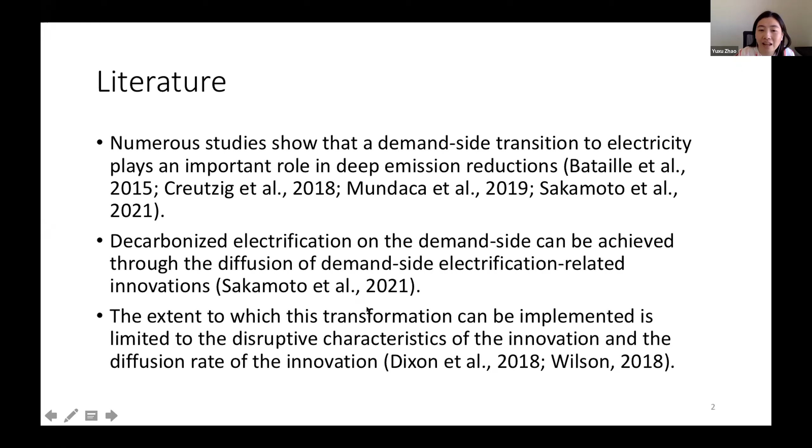Numerous studies show that a demand-side transition to electricity plays an important role in deep emission reductions. Decarbonized electrification on the demand side can be achieved through the diffusion of demand-side electrification-related innovations. The extent to which this transformation can be implemented is limited to the disruptive characteristics of the innovation and the diffusion rate of this innovation.

There are research gaps in understanding how quickly multiple demand-side low-carbon innovations can be diffused in an urgent and accelerated timeframe. Diffusion of innovation research tends to focus on a single technology or case study, or on a small scope of influencing factors. Our research is critical for filling this gap by creating a novel methodology for identifying multiple demand-side innovations and building a more comprehensive understanding of the diffusion of multiple innovations.

Our research investigates how and to what extent demand-side low-carbon innovations contribute to decarbonized electrification, specifically to investigate the factors that affect the diffusion of demand-side low-carbon innovations and factors that affect the disruptive impact of innovations on decarbonized electrification. In order to explore this research question, we developed two models. Both use Kendall's Tau-b correlation to measure the relationships between factors that influence the diffusion of innovations and relations between drivers and inhibitors of scale-up and disruptive characteristics of innovations.

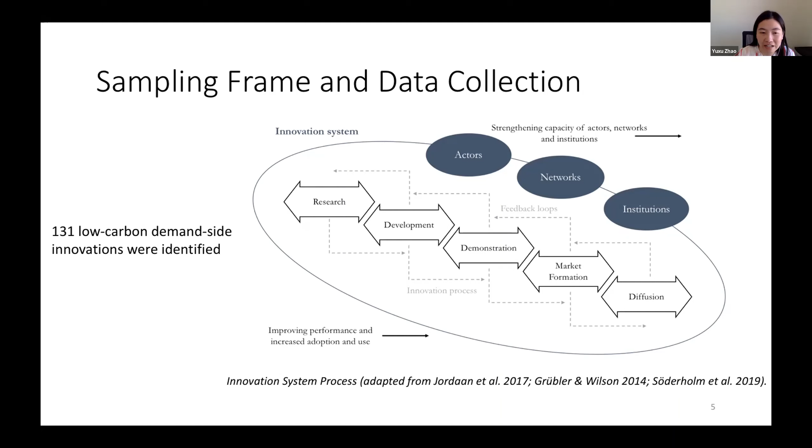131 low-carbon innovations were identified in the demand side. Within the ETIS, a policy domain can be used to identify a regime boundary within which governments and institutions deploy policies.

To encourage innovation, governments and institutions deploy policy mixes. We identified 4 policy domains across the ETIS to survey, using desk research and 2 surveys. The first survey is for a range of stakeholders across the ETIS that we identified through public documents and a chain link. Another survey is for innovation providers using a chain link survey and networks. In total, we identified 131 innovations.

We constructed those types of variables in our research: dissemination rate, characteristic variables, drivers and inhibitors of scale-up. The coding and conceptualization of these variables create the foundation for the development of quantitative models to empirically assess and quantify the rate of low-carbon innovation diffusion, as well as understanding the broader relationship between the diffusion of innovations and the decarbonized electrification.

In order to focus on decarbonized electrification, we developed an electrification framework to identify the innovations that address electrification issues in our datasets. There are 6 types of electrification-related innovations in our dataset.